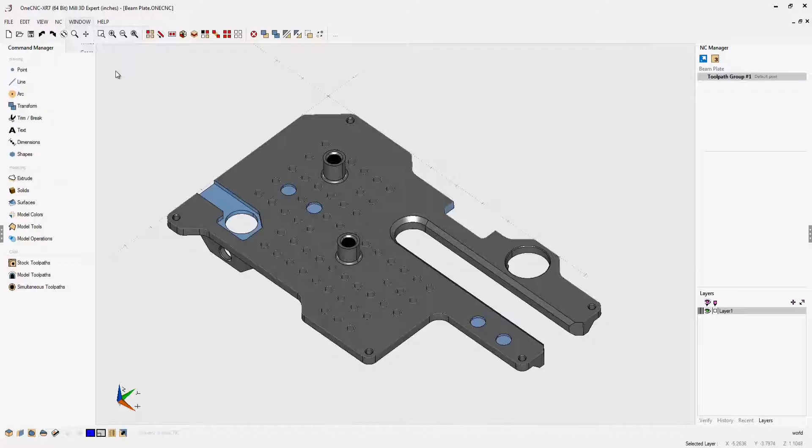Very, very nice. Now, one of the unique features of OneCNC is the ability to work with multiple documents. So if we take a look here, you can see that I can open up the beam plate and I can work with this without having to open up another instance of OneCNC. It's very simple and very easy to switch back and forth between files. So remember, OneCNC is a multiple document application. In fact, you can even cut, copy, and paste geometry from one file to another file if you'd like to.

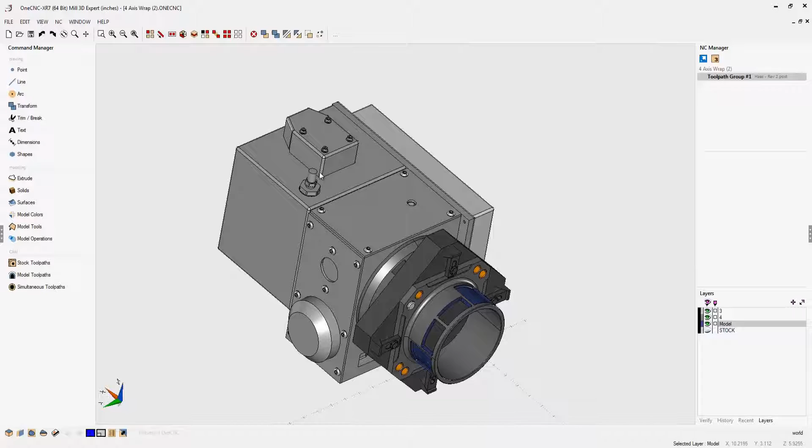Now, another unique feature of OneCNC XR7 is the ability to work semi-full screen or full screen. What this does is provide the ability to take advantage of many different monitor sizes. Let me demonstrate. If I take my cursor over here to the left-hand side of the screen and click on this little button, you can see we can easily collapse that left toolbar. We can do the same to the right-hand side of the screen as well. Just simply click on that little button and that right toolbar will disappear.

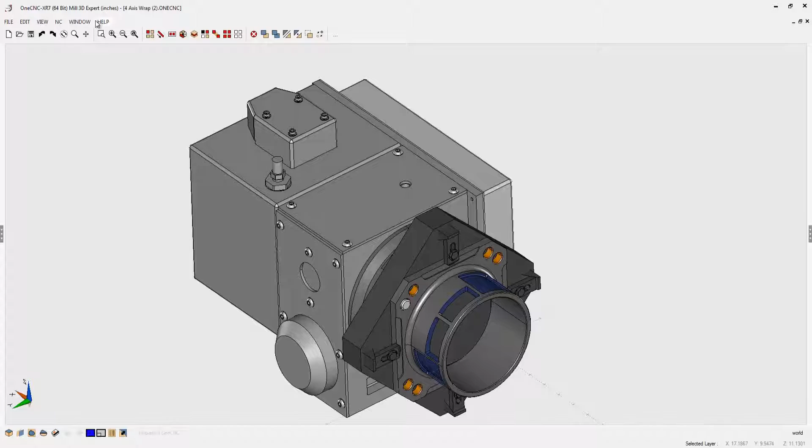Now we can work full screen and we can utilize all of our drop-down menus, toolbars, or custom toolbar to get all of our CAD or CAM work done. This is a very nice, powerful feature provided by OneCNC XR7.

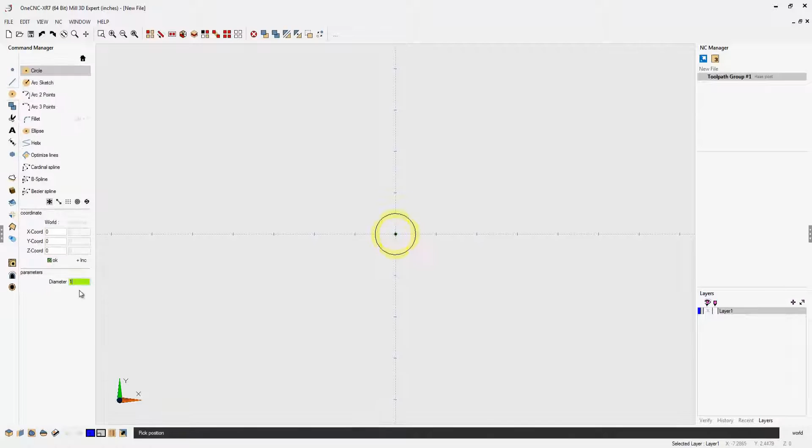Now let's take a look at the geometry side of OneCNC. I'm going to demonstrate how easy it is to create wireframe geometry, surfaces, and solid models, and also use hybrid modeling to create a part. I'm going to start by creating just a couple of circles here. I'm going to join those with just a couple of fillets. I'm going to turn the trim on. That looks very good, so nice closed boundary. I'm going to duplicate that closed boundary and scale it by 50% and drop it down 1 inch in Z.

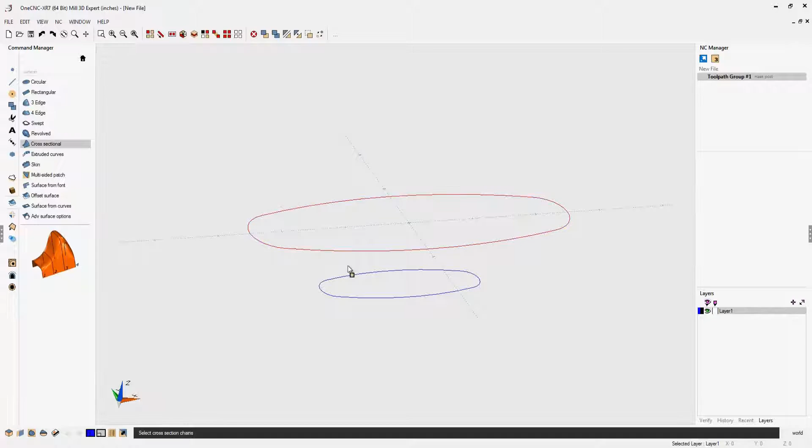That looks good. Now let's create some surfaces from those two rails. I'm going to use cross section. Going to grab that rail and that rail, right click, and there we go. Let's use surface from curves now to create those cap surfaces. Going to grab that bottom rail, and let's do the same on the top there.

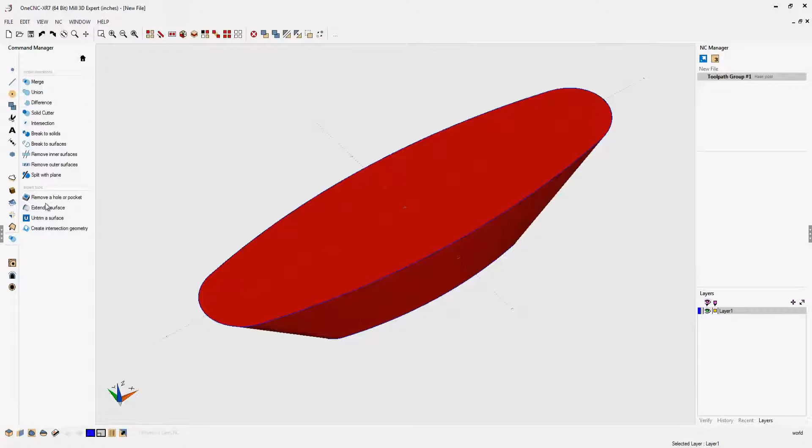That looks very good. Now ultimately I'm going to take those surfaces and create a solid model from those, and that's because I want to subtract that solid model from the main body. You can create a solid model by using the merge command. Now you can see we have just one nice solid model. Very easy, very powerful set of tools.

Let's create the main body. I'm going to use the line tools here, and I'm using coordinate input. All you do is type in the coordinates that you'd like and click the OK button, and then you can create the geometry. Now I'm creating the lines in order, but you don't have to do that. You can create the lines in any order that you'd like.

Very flexible. You can use absolute coordinate input or incremental coordinate input. There you can see I'm referencing off of existing geometry, and here I'm just grid point snapping just to kind of speed things up a little bit.

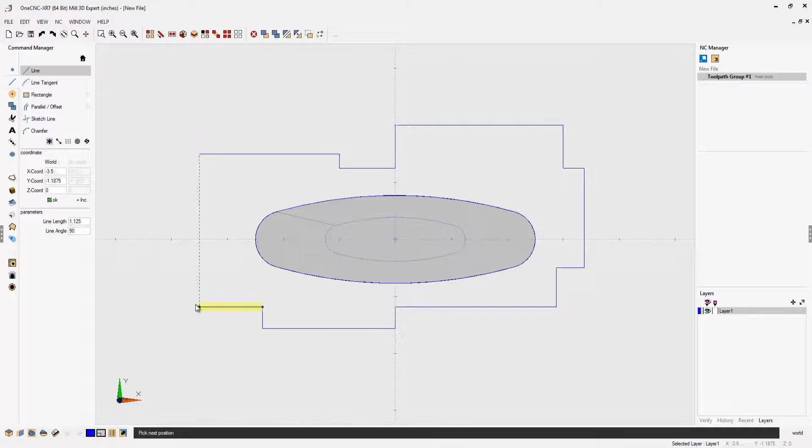There I'm referencing off of that point, referencing off there, and right click to finish.

Let's add some chamfers to this. It's very easy to do. You just left click, and you're always digitizing in groups of two there. Creating fillets is just as easy. I'm going to set that to 0.1875, and again it doesn't matter which order you digitize the geometry in.

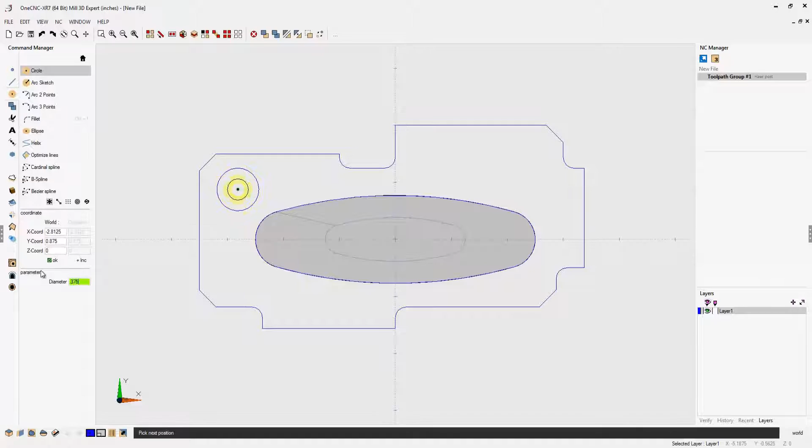Let's create a couple of holes now. I'm going to create one there, change the diameter to 0.375. Again, I'm referencing off of existing geometry. There I'm grid point snapping and also changing the diameter of the circle.

Now I want to create some cutouts. These are going to be shapes that I'm going to cut out of the solid model. And that looks good. Let's make another one over there on the right hand side. That looks very good. Okay.

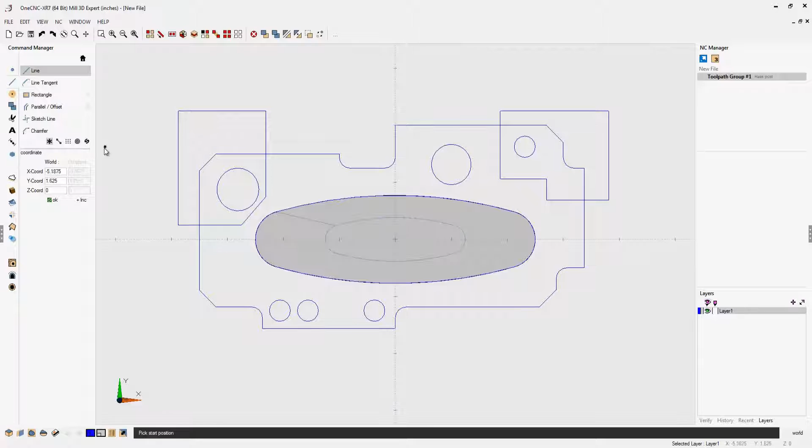Now what we're going to do is extrude that main body. Let's go into our extrude tools, using extrude curves. You can really drag that in any direction you'd like. I'm going to pull that down to minus 0.8. That looks good. And now let's subtract that original solid model from the main body using difference.

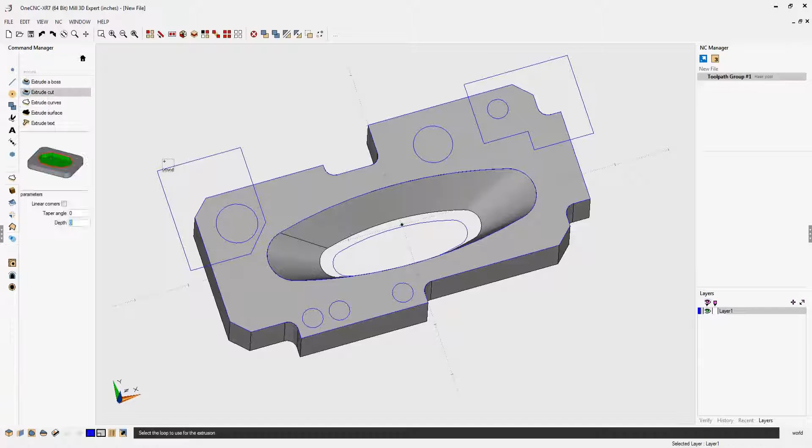Very easy to do. Okay, now we're going to go back into extrude cut, and I'm going to start using those shapes to make our cutouts there. You can see that's also very easy to do. Using the extrude cut command, you can easily cut holes all the way through the model as well.

Let's use extrude boss now, and we put a little taper on that. What's nice is that's just one solid model there. Very, very easy. Now let's use construction planes.

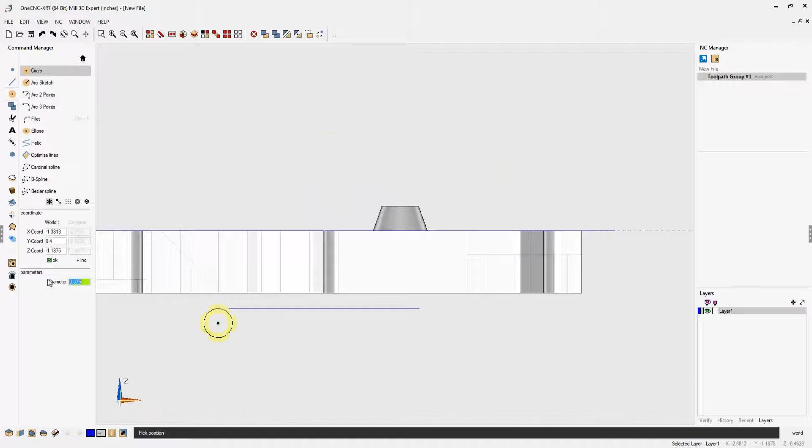Going to create a construction plane on that face and change my view so I'm normal. I'm going to create a cutout that we're going to cut all the way through. Now, when you're using construction planes, your geometry can be relative to the construction plane or they can be relative to the world coordinate system.

So I just did a quick trim on that. And then again, we'll use our extrude cut, push that all the way through. Very easy to do. All right, so now what we're going to do is I would like to demonstrate that

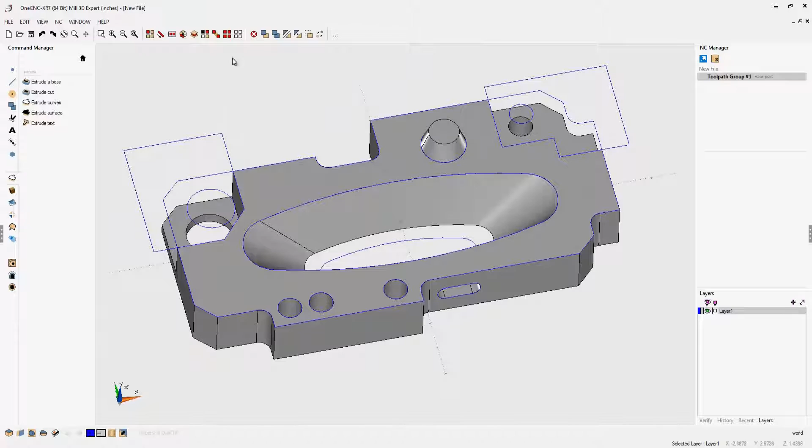We can get rid of that wireframe geometry. We don't need that anymore, so I just selected by color, then hit the delete key.

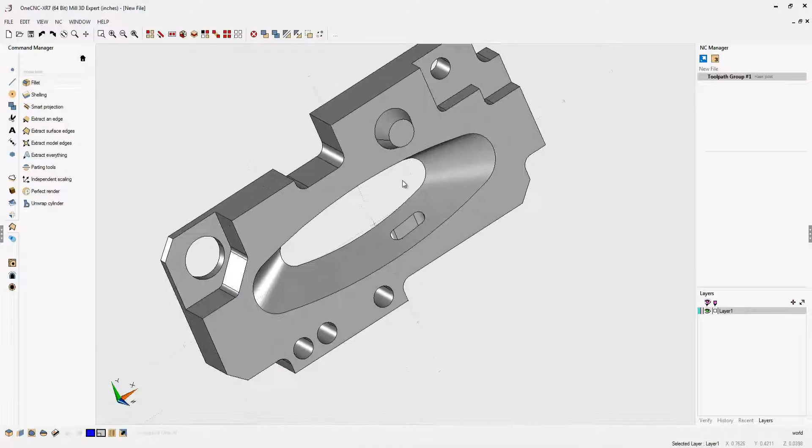Let's create some fillets. Now these tools are for creating fillets and chamfers on solids and surfaces. So let's use our fillet command, set that to an 1/8 inch. Notice how OneCNC changes the geometry to translucent so you don't have to rotate the part to easily select the edges. Let's put a 200 thousandths fillet on that opening there on both sides.

That looks very good. And let's go to chamfer now. We're going to put some chamfers on those holes. Again, OneCNC changes the geometry to translucent, so it's very easy to select those edges. That's very good. That's looking really good.

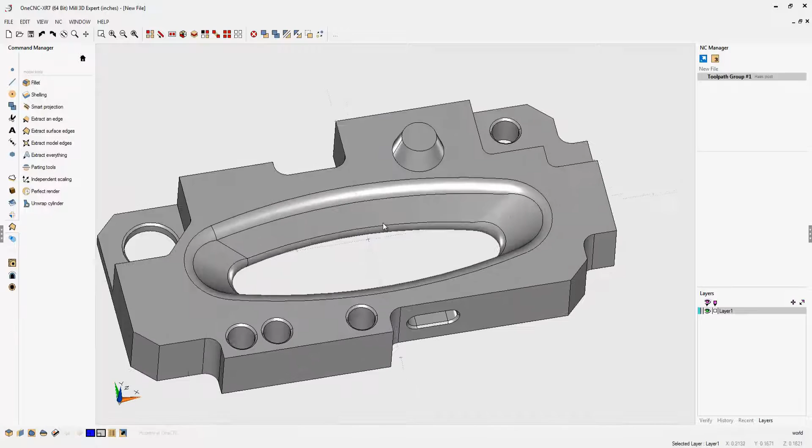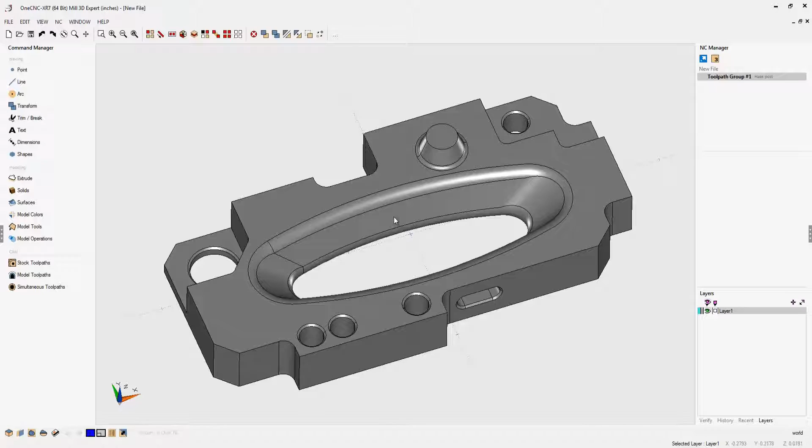What we're going to do now is create another fillet at the base of that boss. And why don't we demonstrate also how easy it is to, for example, alter the geometry. In fact, let's change the color of this shape to maybe a dark gray. That looks good. You can also identify or color individual faces using XR7, using the color surface command.

I'm going to change the color of that inside cutout to blue, and that may signify that it needs a different surface finish. So that's a real easy, very versatile command within OneCNC. All right, so there you go. There is a quick example on how to create geometry using OneCNC.

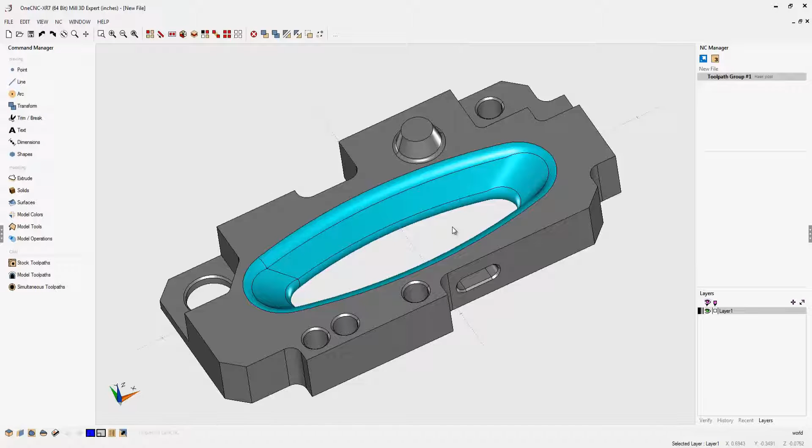Very easy to create wireframe geometry, solids, and surfaces. And if you'd like, you can use hybrid modeling to combine all of those to easily create shapes. Very, very nice. Now, OneCNC also provides a very easy, straightforward approach to adding dimensions and text.

Let's demonstrate using this new shape. I'm going to start by panning and zooming in just a little bit. Let's go back to our main toolbar.

We're going to select dimensions. Let's go with a horizontal dimension. I'm going to simply left click that piece of geometry, left click that piece of geometry, just drag the location down and left click. Once I do that, I now have the ability to modify the attributes of this dimension.

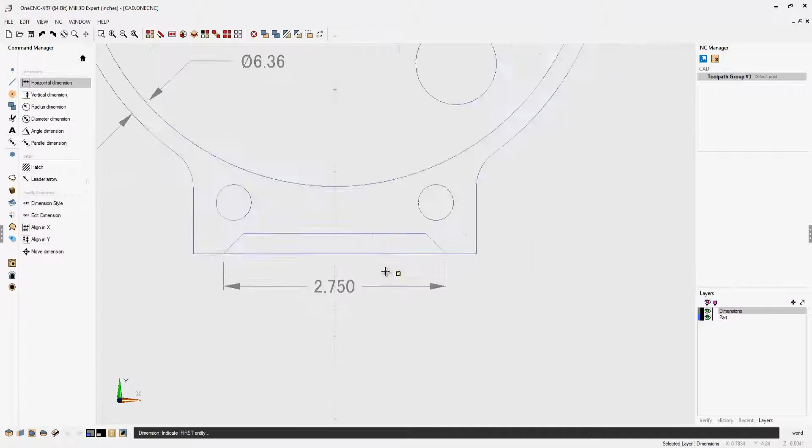That looks great, so we're going to click OK, and there we go. Now let's give you another example. We're going to create a diametrical dimension. Going to left click here, drag this down, and let's make some changes to that. Instead of just having the dimension, why don't we add something like typical 4 places? Very easy to do. When I click OK, you can see now that we have some nice descriptive text added to our inline dimension there.

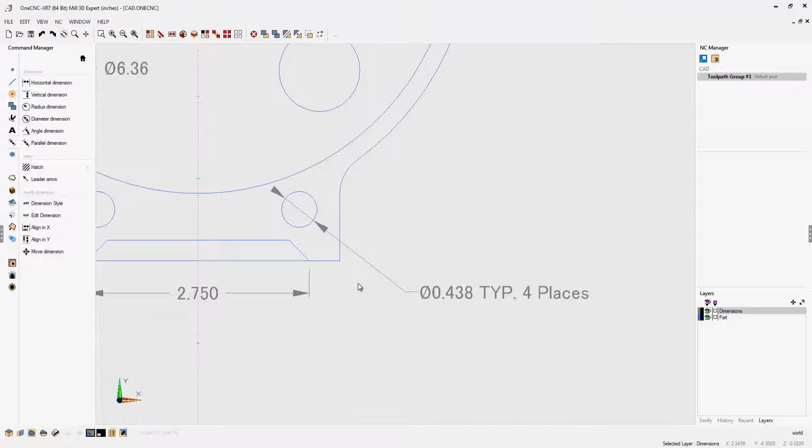Very, very nice. Now let's take a look at another quick way we can add dimensions to a part. In fact, let's focus on a solid model. This can be quickly accomplished by using the pages command. So we're going to select pages. First thing we want to do is select a template. These are the predefined templates you can select from, or you can create your own templates if you'd like. I'm going to use that one and click OK. Now what we can do is quickly add different views of our solid model.

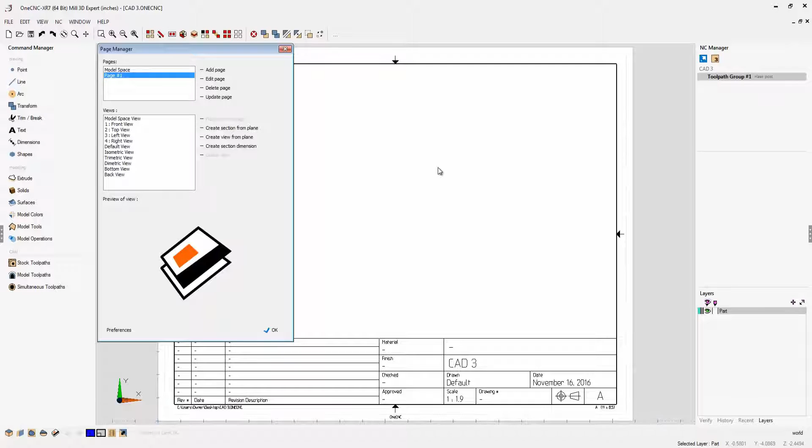Let's start with the top view. There's a nice preview of the view. I'm going to use place view on page, just take my cursor and left click there. How about a front view? I'm going to select front view. Again, there's a nice preview. I'm going to use place view on page, use the alignment grid and just left click. How about isometric? Again, there's the preview. That looks great. Place view on page, and I'm just going to left click right about there.

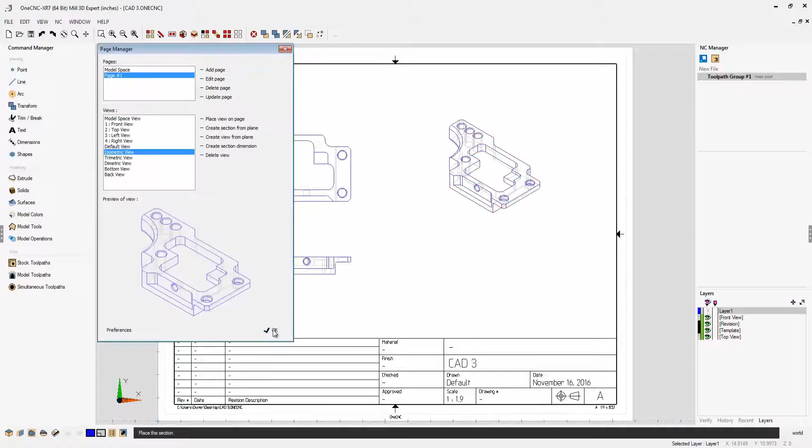So this is called page space, and if I were to use these arrows, I can easily move back and forth between model space and page space. Now the reason why this is so important is because you can make modifications to your solid model, and those modifications will show up within page space.

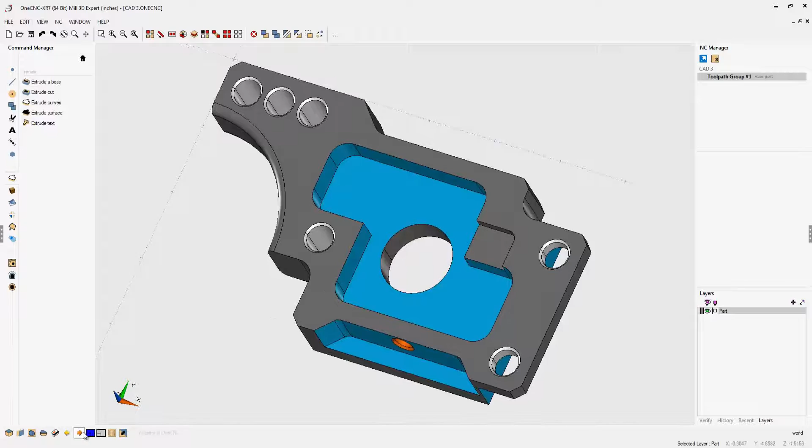In fact, let's create a circle here, and I'm just going to use the extrude cut command to cut a hole through there. That looks good. I no longer need this circle up here, so let's get rid of it. Now if we go back into our pages, that looks good. Let's bring our menu back up, and we can choose this option called Update Page, and you're going to find all three of those views are going to update with that hole.

And there we go. Now the next thing you can do is add dimensions. Adding dimensions to this is just as easy as adding dimensions to a 2D part. Let's demonstrate. Back over to the main toolbar, we're going to select our dimensions option. Let's start with a horizontal dimension. We're going to left click and left click, push the dimension up where you want it and left click. That looks good, so I'm going to click OK to that.

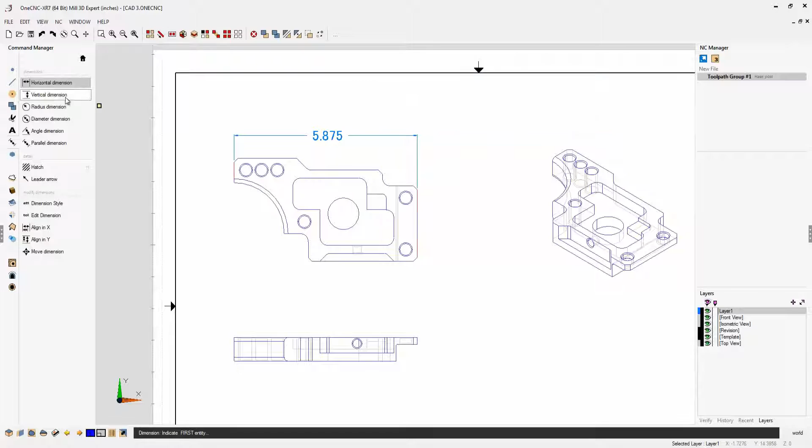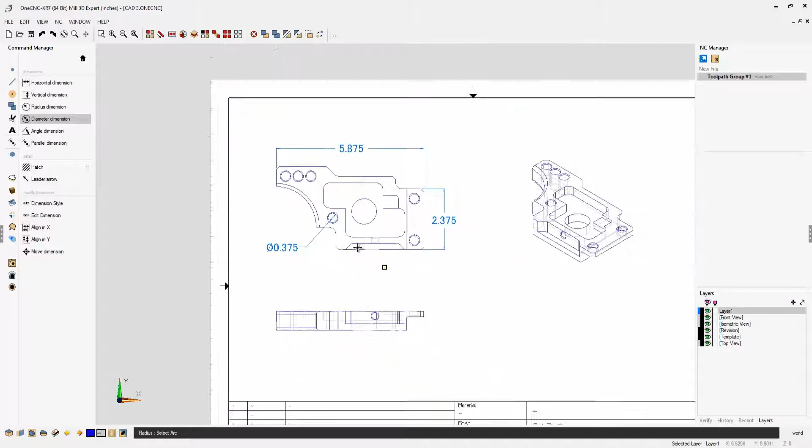I'm not going to dimension the whole thing, I just want to give you an idea of what it's like to add dimensions within page space. You're going to find it's identical to adding dimensions within model space. So that looks good there. Why don't we finish up with a diametrical dimension? Let's grab that inner circle there and place that right about there. And that looks great. Okay, so that's using the pages command within OneCNC to quickly add dimensions to a solid model.

Now let's take a look at applying toolpath to our geometry using OneCNC. You can apply toolpath to wireframe geometry, solids, or surfaces. The procedure I'm going to demonstrate is exactly the same within OneCNC mill, lathe, wire EDM, laser, plasma, or router. Let's first take a look on the right-hand side of the screen where the NC Manager is. That's where you store all your machining operations.

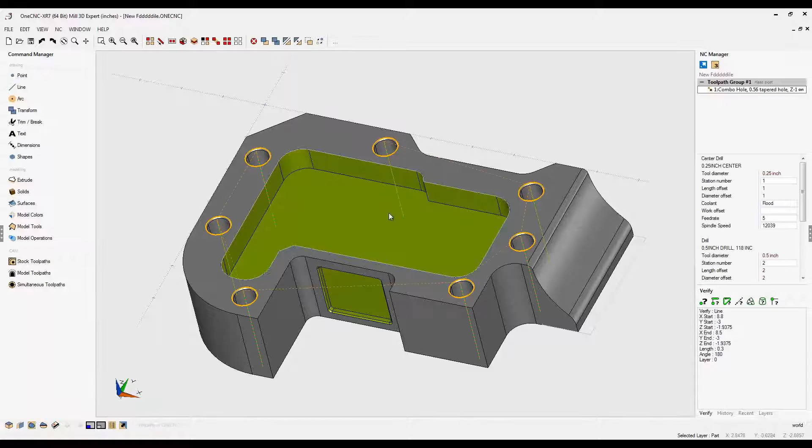You can see I've already performed a hole operation here. Now let's take a look over on the left-hand side of the screen within the CAM area.

For milling, you have stock tool paths - these are your 2.5 axis tool paths. You also have model tool paths, which are your 3-axis tool paths. And then you also have simultaneous tool paths, which are your various 4-axis and 5-axis commands.

Let's start with high-speed pocketing. We're going to select the geometry. This first dialog box is where you're going to select a tool.

Now you can manually create a tool by typing in values, and as you do that, the graphics will update over there on the left-hand side. That's a very powerful feature within OneCNC. You can also select from a list of tool holders, or manually or parametrically create holders if you'd like.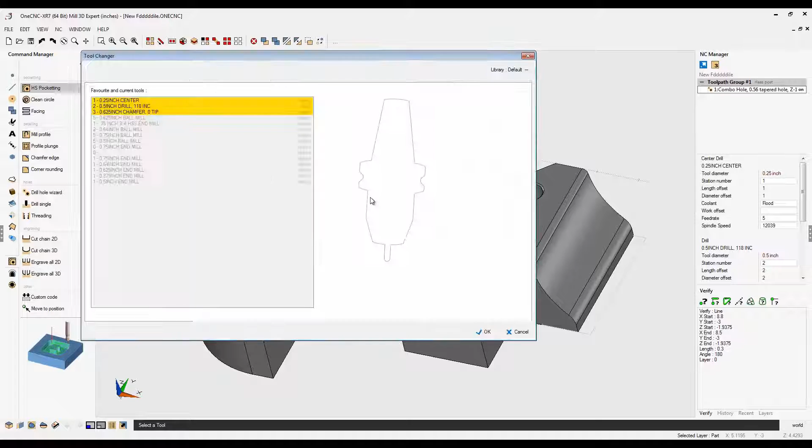That looks very good. Now if you want to, you can select a tool from the tool library by clicking on Tool Changer. Let's go with a 3/4 inch high speed end mill. And once you do that, the speeds and feeds are automatically calculated based upon the material you have.

If I change it from aluminum to copper, you can see the speeds and feeds change. Let's put that back to aluminum billet now. I think that looks very good.

Now let's take a look also at the feed control. First thing I'm going to do is change my turret position to turret position number 1. But let's go into feed control. Now feed control is going to reduce your cycle time as well as extend the life of your tooling.

Let's demonstrate. Within the feed control, you can see that you can make the tool slow down as it approaches a sharp corner, and you can also make the tool slow down when it machines small arcs. You can control the size of the arcs and the distance before sharp corners over here on the left, and you can also control the percentage of feed rate that's going to be changed as well.

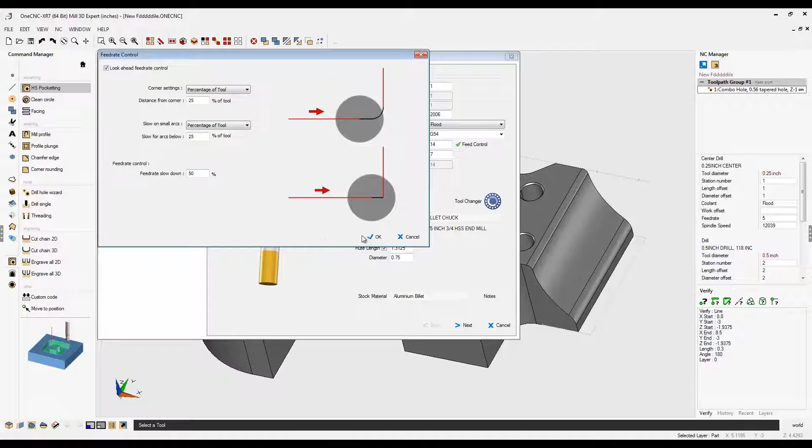Now once you do that, you can up these feed rates. In fact, I'm going to up this to 25 inches a minute, because these feed rates are going to be applied to straight vector cuts and to circles that are larger in radius than what we've specified here within the feed control. So this is going to reduce the cycle time. Very nice feature. Let's click next.

Here's a dynamic dialog box that shows our different clearances and different Z depths. For example, the rapid Z plane is represented by that red grid. So if I change that to 2, you can see that dynamically changes. Also notice that we're seeing our part in here, which is also very nice feedback.

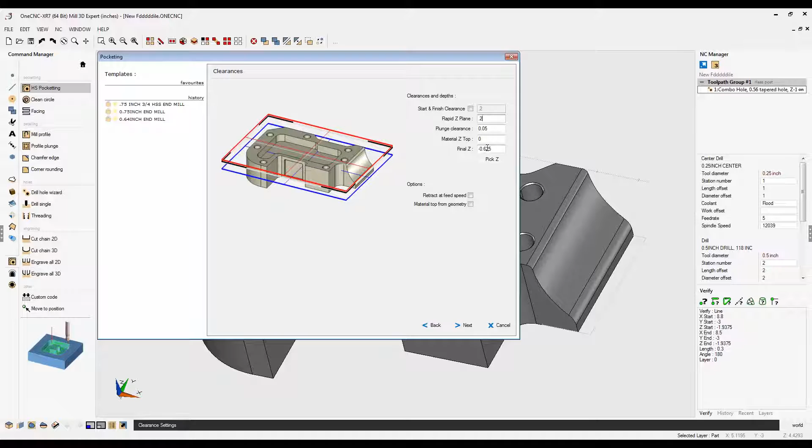For Z depth, if you want to, you can select Pick Z and actually snap on the geometry, and OneCNC will populate the proper Z depth for you.

These are the different types of commands or machining operations for pocketing. I'm going to use high-speed closed. By the way, high-speed machining is available in all the OneCNC mill packages. Let's click next on that.

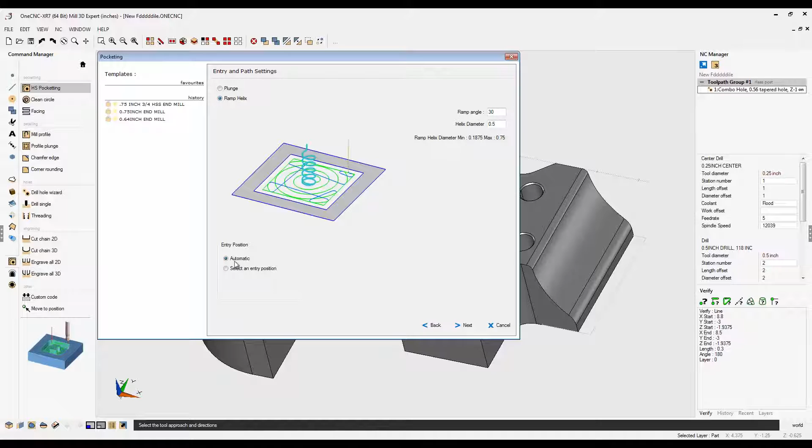We're going to ramp - in fact, we're going to ramp helix. I have my helix diameter set, my angle set. You can actually ramp in at any location within the pocket, but I'm going to use automatic for this. We're going to click next.

All this looks great. My step over looks good. My depth of cut can leave 10 thousandths on the wall there. Don't need an extra finish pass. We'll let OneCNC generate the toolpath. Very nice, very quick and efficient.

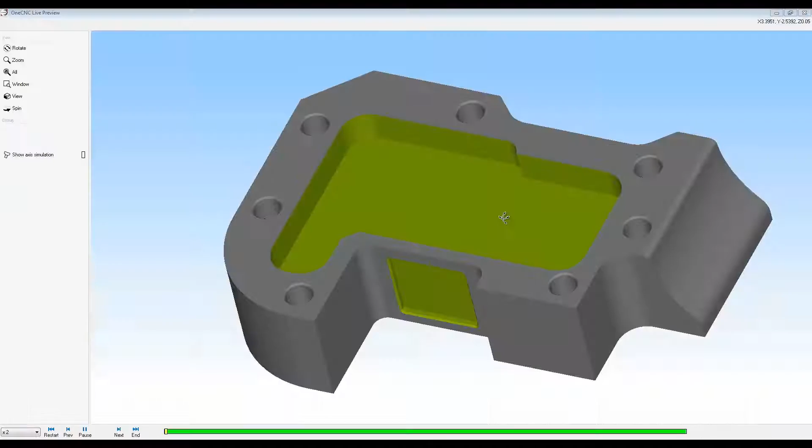Now what we're going to do is take a look over here within the pocket operation, and I want to show you preview. I'm just previewing that machining operation. This gives you a nice representation of the tool interacting with the geometry.

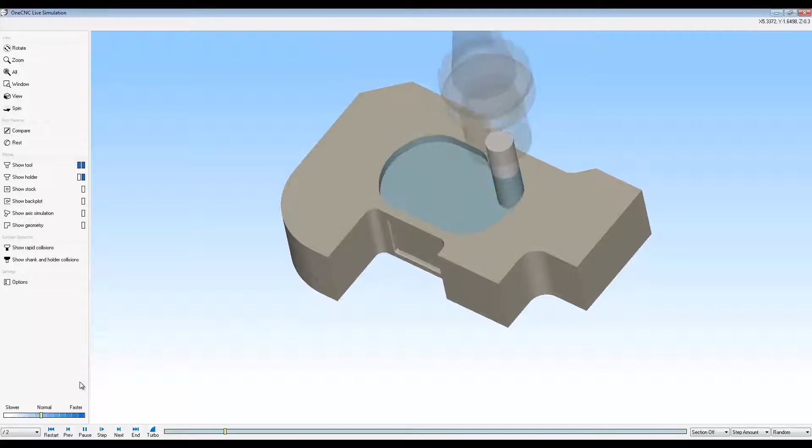Now if you want to see actual material being removed, what you want to use is simulate instead of preview. So let's go to simulate rest. You can use different types of stock. I'm using a solid model here, and there you go, there's our solid model, and you can watch the tool removing material.

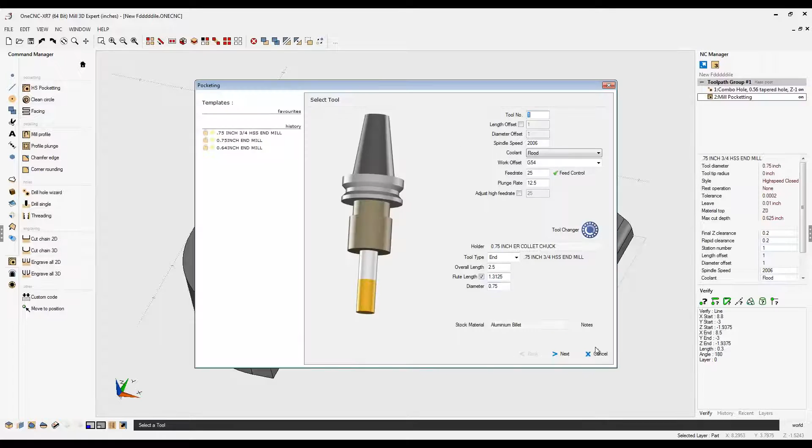You can speed this up, slow it down, rotate, zoom in, zoom out, back plot, cross section. There's lots of neat things you can do inside of there. You can also turn these different operations on and off, and that will tell OneCNC to just preview or simulate just those operations. You can also easily reorder the operations by dragging them, which you can see here. It's also very nice. If you want to edit an operation, you can just right-hand mouse click and select Edit Operation. That looks good.

All right, now let's apply a 3-axis toolpath. How about a planar finish command? So this works exactly the same way. First toolbox is where you're going to define a tool or select from the library. You can dynamically change the values. I'm going to leave everything alone there. I think that looks good. Let's click next. I think our clearance values look good on this, so I'm going to leave that alone. All that looks fine. All right, so let's click next on that.

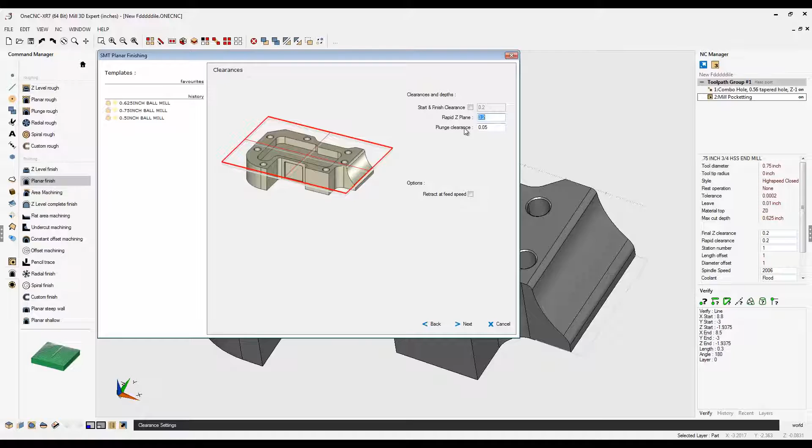I'm going to leave the toolpath angle set to 0, but you can change it to whatever you'd like there. We're going to just use a constant step over of 20 thousandths and climb cut. And for the boundary, I'm going to use pick. I'm going to select that boundary I made a little bit earlier and let OneCNC generate the toolpath. You're going to find that OneCNC calculates toolpath very fast, both 3-axis and 2.5-axis machining. Very nice and very efficient.

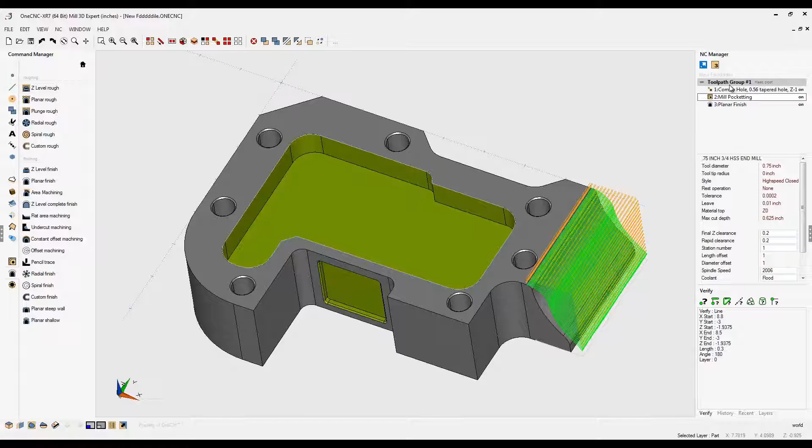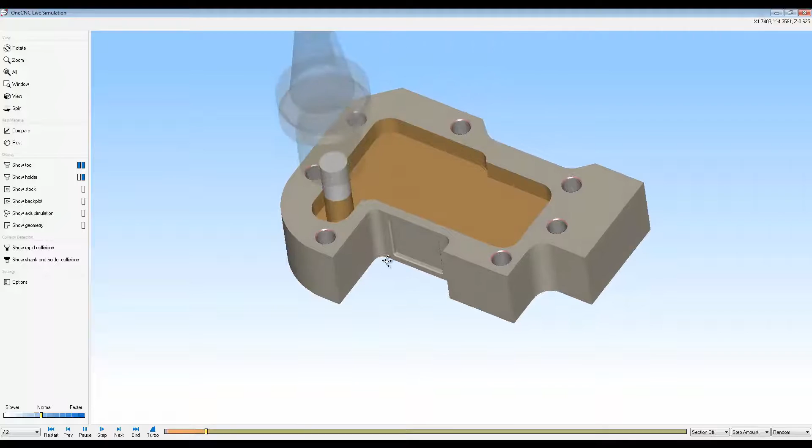Now let's take a look at simulating all the toolpath. I'm going to right-hand mouse click on the toolpath group, select Simulate Rest. We're going to use a solid model for our stock. There's our spot drilling. There's our canned cycle, G83 for our drill, and canned cycle G81 for the countersink. Here's our high-speed pocket operation. And of course you can do various things like backplot toolpath if you want to. You can zoom in, zoom out, rotate, whatever you need to do. Very powerful toolpath simulator and preview provided by OneCNC. Very good. Now let's exit out of this.

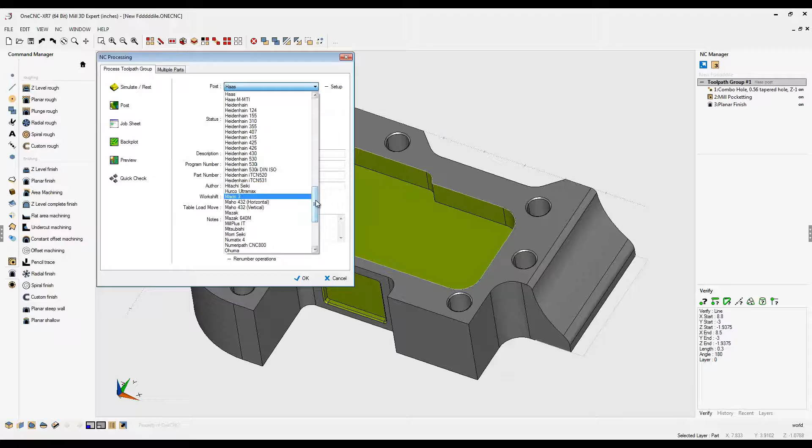Let's take a look now at creating some CNC code. So what I'm going to do is I'm going to double click on the toolpath group, select post group, and this time we're going to select our post processor. OneCNC ships with over 100 post processors. You can create posts and easily edit posts if you'd like as well. We're going to go with the Haas here, click save, and we're going to replace that file there, and this is going to put the CNC program within the text editor.

Text editor is very powerful, provided by OneCNC. Lots of nice commands you can execute inside of here. There's also some various calculators as well. You can use the standard Windows calculator, but if I come up here and click, you can see there's also a nice calculator for helping with tool paths, RPMs, speeds and feeds, and things like that. Also note that the text editor also comes with full RS-232, so you can upload and download your CNC programs if you'd like.

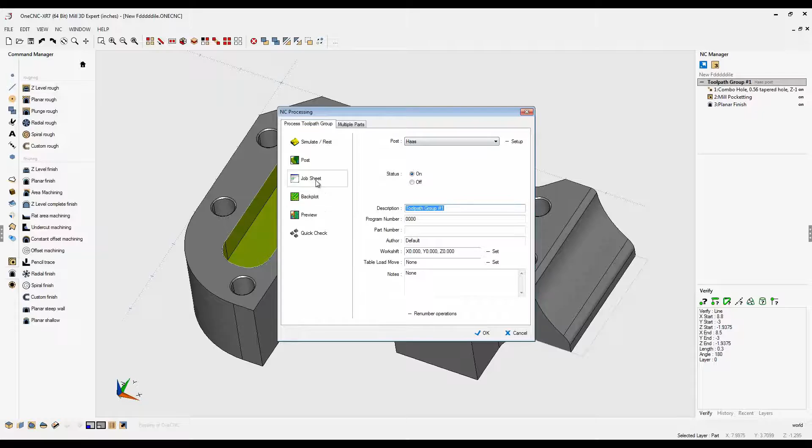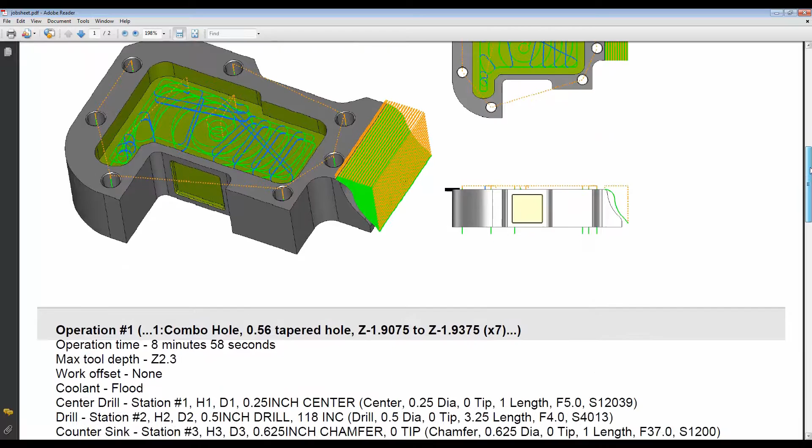Now let's take a look at making a setup sheet. Those are called job sheets within OneCNC. This is very nice. This creates a PDF file. So let's view the PDF file. Let's zoom that up just a little bit. You can see all the pertinent information, cycle time, what machine tool was used, the different tools that were used, some nice graphic overview of where the X0, Y0, Z0 is. And then each machining operation is broken down individually so you can see individual cycle times, the tools that were used, and things like the work offset, maximum Z depth, and so on. So very, very nice job sheet provided by OneCNC.